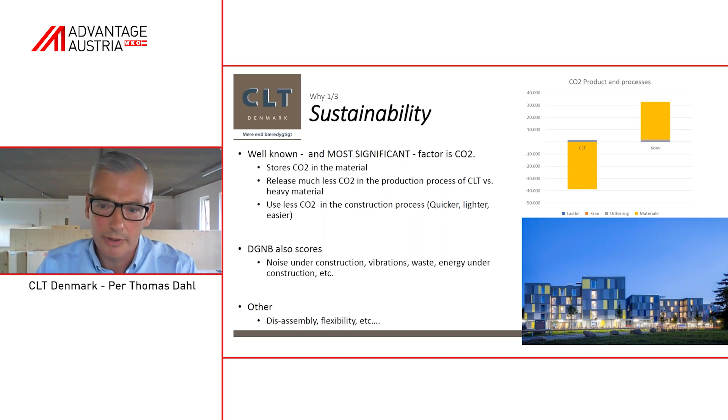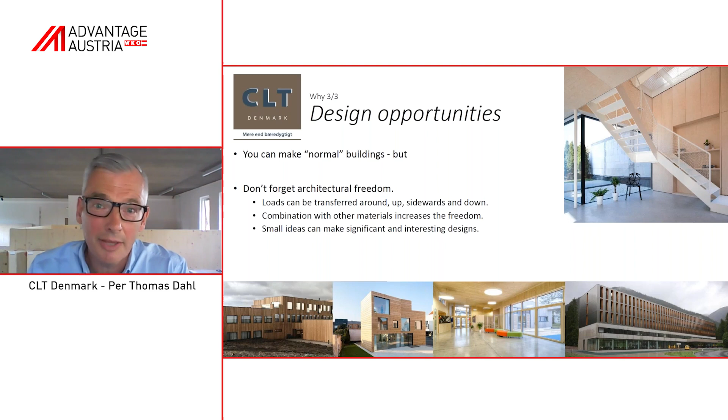It's a new library in Barcelona, and it's being erected at the moment. Some of the pictures I will show you were taken in March, just before the Corona close down. Not much has happened since, but now they have started up at the construction site again. Look at this picture, for instance. Look at the way it's working, the view through it, and how you move around with the loads. I think it's very impressive.

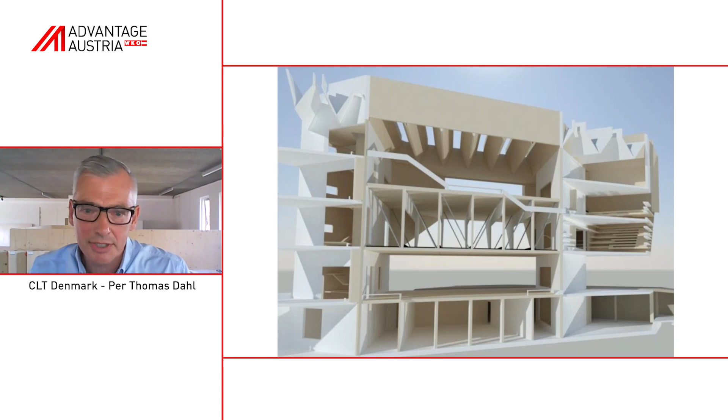And here you can also see the combination of materials, as Michael talked about in the opening. Here you use steel. You will also have concrete, and of course you will have glulam and CLT. So it's all combined, and I think it's very interesting.

Unfortunately, I got some latest pictures yesterday, which I wasn't able to put into the presentation. But if anybody wants to see more of this building and be challenged by it, you're most welcome to contact me, of course. I look forward to seeing this building when it's done. But here you can actually see, I think CLT is quite a simple product, but the way it's used here is so challenging that you will get a great architecture.

So the conclusion of the idea and why, seen in my perspective, is of course the sustainability factors, but it's also the BIM-VDC and the process factors, so we can start working as a professional industry in the building industry, and then it's also the architectural freedom. So that's a conclusion on that.

When we look into the processes and the decisions of how we're working, of course, early involvement, like any other project, is important here. And yes, we will be able to go into a dialogue from this industry with any kind of architect, building owner, engineer, in order to optimize the projects. I will come back to that.

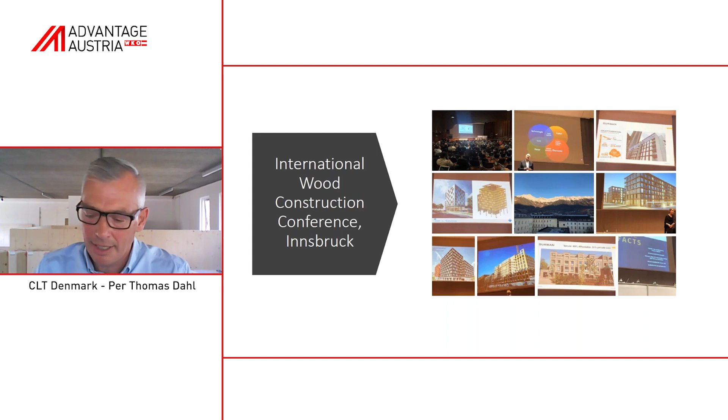So we should exchange facts from other projects regarding design, as I said on the slide, planning, structural engineering, acoustics, fire, and also the education on the installation, and I will come back to that. So the do's and don'ts, let's work together with the industry.

And then the last slide on this part, I must say the CLT guys, they know their business, like the concrete guys know their business. But these, I'm impressed. I've also worked with concrete and other products, but they know how to load a truck. They know how to make the order of assembly. They know how to optimize the production of CLT. So everything is just in order. So you will be guided through the process.

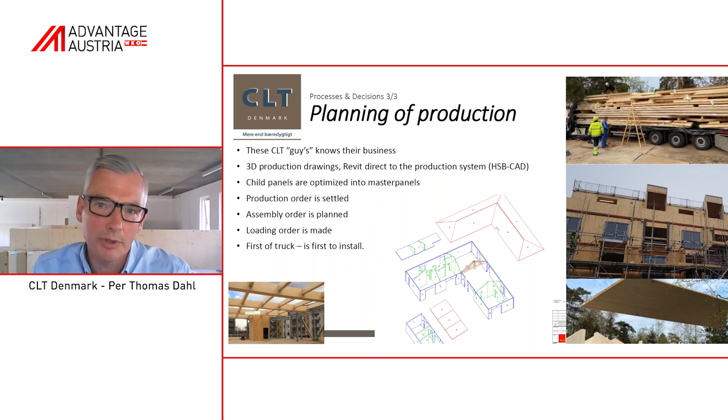So the conclusion, I think, on the processes and the decision here is: you have the knowledge, you should use it. You have the opportunity of early involvement, and you should take the large savings you have making the optimal design. And then actually planning is quite easy. I will come back to that on some of the next slides. But this product is so precise. The tolerance is 1 to 2 millimeters, so you can actually carry on with your work immediately.

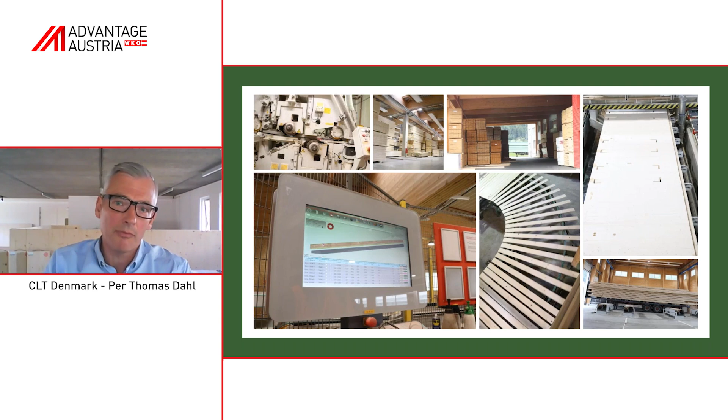On the right-hand side, you see a finalized panel where the CNC is working, and you're cutting out doors and windows and installations and so on. It's all done automatically. It's all done by Revit, talking directly to this machine.

We will talk about teams, who will do what, number of teams, what kind of protection system, scaffold, lifts, and so on. And then, of course, when we mount, we start to mount preliminarily, so we will just attach a few screws, but immediately after, we attach all the screws, and we will also make the quality check right away and on the go.

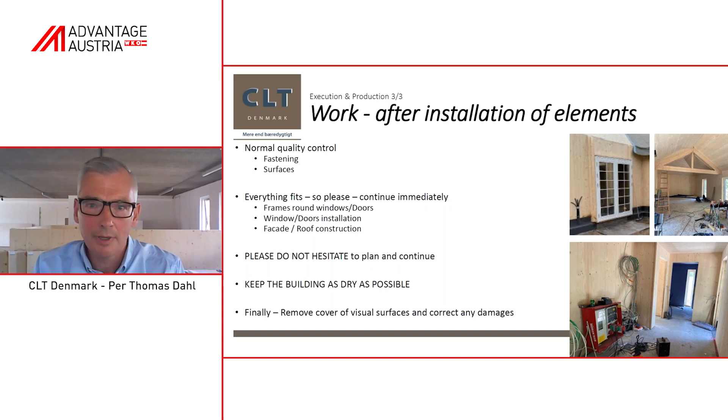And of course, keep the building dry. You have a dry product coming in to your site, keep it dry. And there are, as I mentioned earlier, different possibilities to do that. And then finally, at the end of the day, remove the cover and correct any damages which have happened. But I must say it's not much. But of course, things can happen.

So at the end of the day, execution and production: you have made your construction strategy, maybe together with your business partner, in some cases hopefully us, but in other cases other partners. You have no tolerances here, or very low tolerances, so make the quick assembly, keep the building dry, make your final quality control, and you are on the run.

So in total, just recapping. First, CO2, sustainability, BIM, VDC, and the lean processes also in the design. That is the idea and why, and the architectural freedom, don't forget that. Next, the processes and decisions. We have the knowledge all over the world. We are taking some of it to Denmark now and using it, making the early involvement in the design process. Everybody around the table is very keen on being part of the design phases, so let's make the planning.

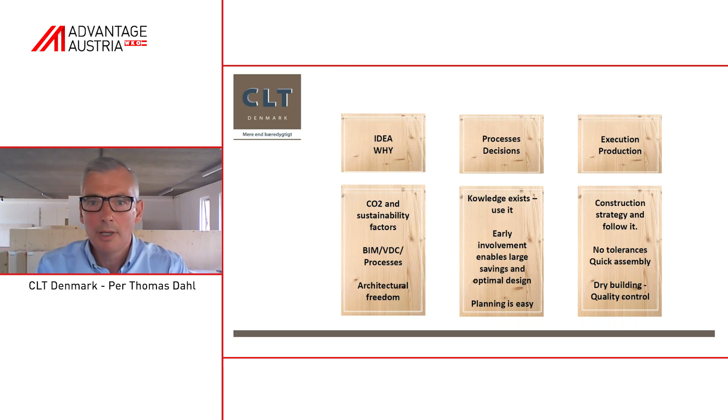And finally, on the execution and production, you follow your strategy, be aggressive in your plans, keep the building dry, and make a thorough and good quality control. And my last slide is just a little bit of an appetizer to see some of the nice buildings which are created around the world, and hopefully it's also giving you a little bit of appetite, Michael. So maybe I should invite you into the screen again, if you have any questions.

I do have questions, Per. Thank you for your presentation. We actually got one from the audience, and the first one is, who's the architect of the Barcelona library? Do you remember that? Yes, I have the name, but please contact me afterwards so I can give the details, or I can write it there. I can actually find it during the other presentations. I can't remember the name, but yes, I have it.

Then I have some questions regarding, do you do turnkey projects, where you deliver both the materials and the people for mounting it? Yeah, our setup is that right now we don't want to employ blue collar workers, but we have found some very good business partners, large contractors and smaller contractors, depending on the size of the project. So we can easily find people whom we will educate and use. So yes, we can also make turnkey projects. And of course, if it's a fully turnkey project, we would find the right contractor to work with us.

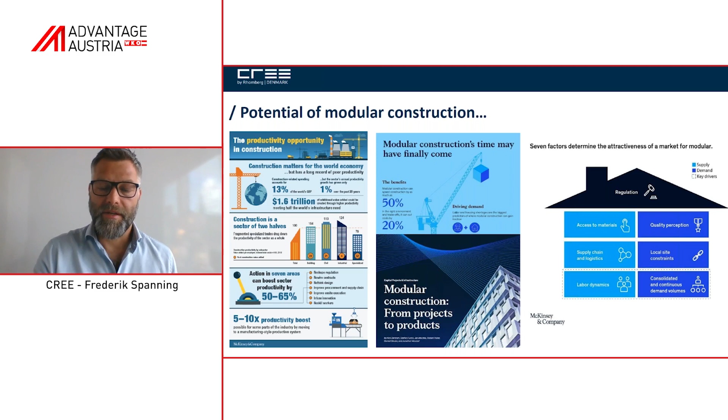We've been talking about materials, and we've been hearing Per talk about materials. So yes, that's of course an important part of it. But mastering the design to support modularization is of course very important. Our technology needs to support it, and the whole outset has to take logistics into consideration, and of course assembly being something that we have to take care of right from the outset.

The outset in this way of working has to be early. We cannot wait till we've decided on perhaps the aesthetics of the building. We have to start very early, and as we've heard previously, BIM gives us some opportunities, but we have to have a real determination to have this discussion at the earliest possible time, and today with very well defined components, it is possible to have a real discussion at the very early stage about how to become modular, how to improve this productivity, and of course the goal for a lot of us is to save costs when doing this.

So early discussions, according to the McKinsey research, will bring us into a situation where we get a kind of sweet spot between quality, time, and costs, and we can bring these meandering processes that we have in construction into a true discussion about the actual product, which is what the client takes away from it all.

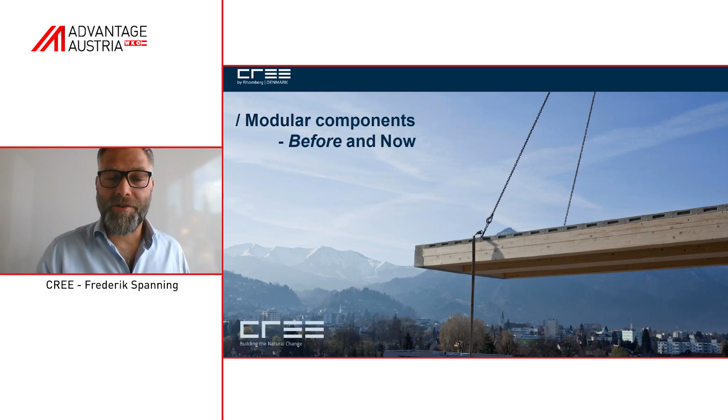But we're not quite there yet. We have gone, certainly in the 50s and 60s in Denmark, through a great wave of industrialization, but we haven't moved productivity, and we haven't really moved time. We're not really faster than the building we saw on the slide. So what is it we have to do? What is the next step in this? Well, if we really want to be industrial, we need to look at the components, and of course the materials.

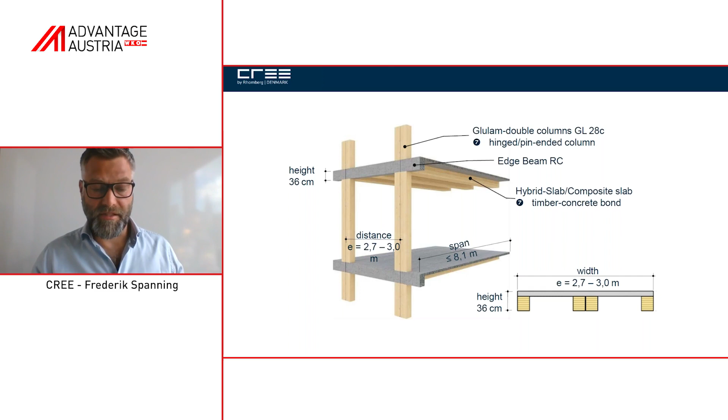Well, basically it's because it supports the idea of modular. It can be made to very high precision. It supports the idea of industrial, and it's possible for us to make this transition today, even maintaining all the requirements, all the regulations that we have. In this case, in Cree we've used it for a systemized approach in the LCT system, but we also use other materials, mainly for the reason of regulation, but also because we want to use each material where it's best.

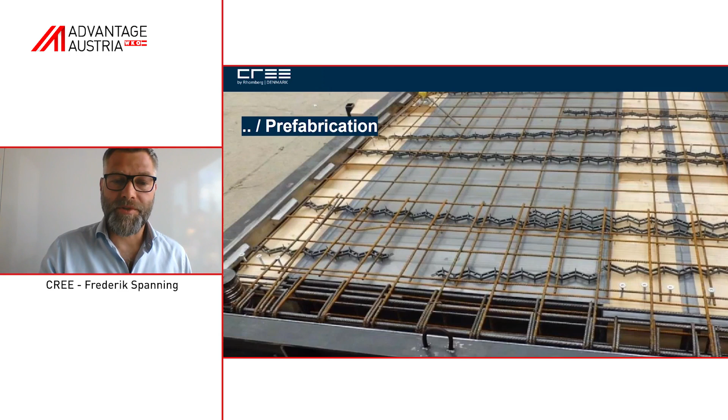So to do this, to get the efficiency, to get the productivity and the low time, high speed on-site, we want to move away from the on-site processes. We can't control them, and we want to move into controlled environments where the environment is good, the work and health aspects are good, and basically bring prefabrication as far as we possibly can. The more accurate we can be, the less time we spend on site, the more we can bring up productivity, the faster we can do it.

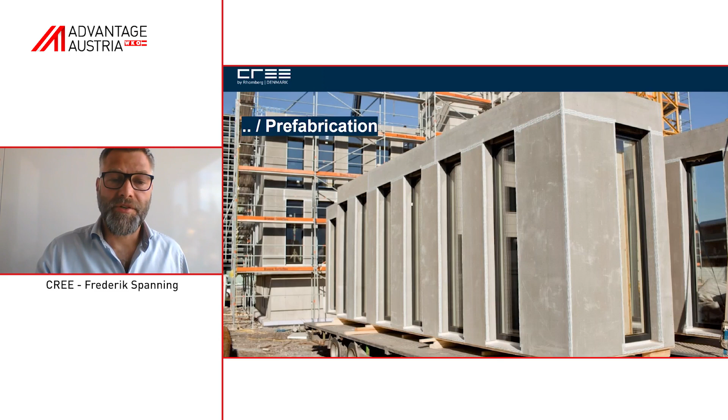Here, slabs ready to be shipped in. The more functions we can put into components. In this picture, we have a facade element with multi-functions. It has load-bearing capacities, it has a window, the insulation, and it also has finished surfaces. And not least, it has an ability to be shipped and assembled very quickly. Logistics is a huge part of it. Of course, we need to have logistics as a kind of a driver for the design, and to think in the logistics right from the start.

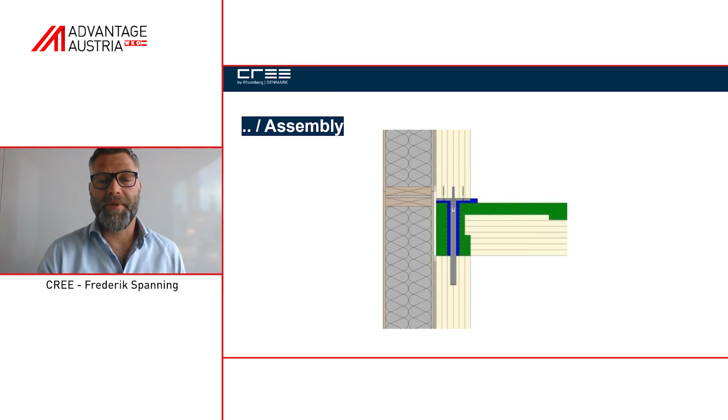So what we want to do is move away from the sort of erratic, non-controllable processes on site. We want to be able to assemble very quickly. In these examples, you have industrial components that are very simple. They are repeatable. You basically have the same type of connecting in all buildings all the time. So in that way, there are no surprises. The joints are visible. They're not interlocked and cast together in a way you can't get them apart. So you can also disassemble, but it's repeatable. It's simple. You don't have to reinvent it every time.

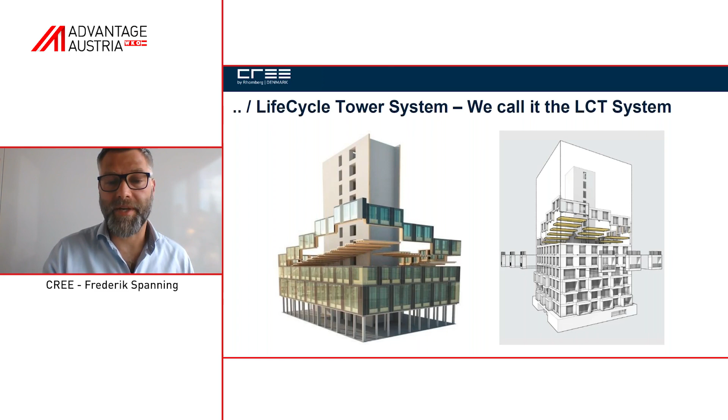So the concept of moving construction into assembly is a very important part of it. And of course, all of these aspects need to be put into play and be aligned for a very quick assembly. A lot of you have seen this before, but it's still a very good example, I think, of how to put together a building of 8 floors in 8 days. Now, obviously, a lot of thought has gone into this, but it still says something about how to be modular, how to be industrial, using the logistics as a design driver.

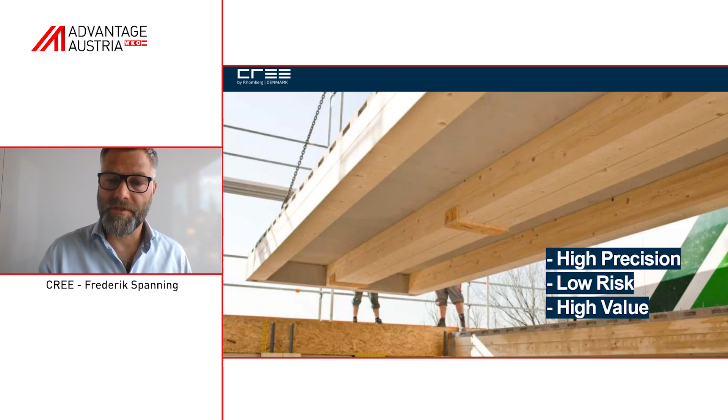And you end up with this room. It's a dry room. It's a superstructure that's airtight, weathertight. You can make a blower door test on this, and you're ready to work the next day on the next layers, the next surfaces that have to be put into the building. And what drives this? Well, the wood gives us the opportunity to have a very high precision. We have such a high precision that we draw the tolerance and we build with the tolerance. It lowers our risks and it increases our value.

Being digital is a huge part of this. And maybe this is not the sexiest of slides, I admit that, but there's actually a small film on this, and I might just urge you to go into our technical partner's LinkedIn profile, HD Lab. They helped us by making a parametric design where we can use the specific components. So some of the components you see in this slide, they actually put together

as a tool to make the design at the very first meeting, almost the very early days with clients, with architects, with the design engineers, make an easy to use sort of interface on how the components, the actual real life components, are used at the very outset of a project.

So have a look at HD Lab's LinkedIn page and see how the modulo that they quickly hacked with the simple software, how that can be used to generate buildings and bring home this message of modularizing the construction to the partners in the project, and that way get this integration vertically and horizontally that we're looking for.

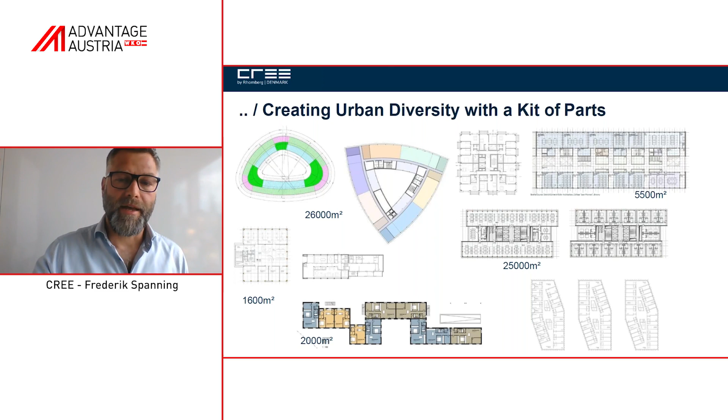So why does it all have to be square, you say, when you build modular or industrialized? Well, it doesn't really. All we're looking for is repeatability, and for modules that can be built and transported. In this case, you can see various footprints, all built with the same solutions for same detailing, the same connection details, and the same industrial processes.

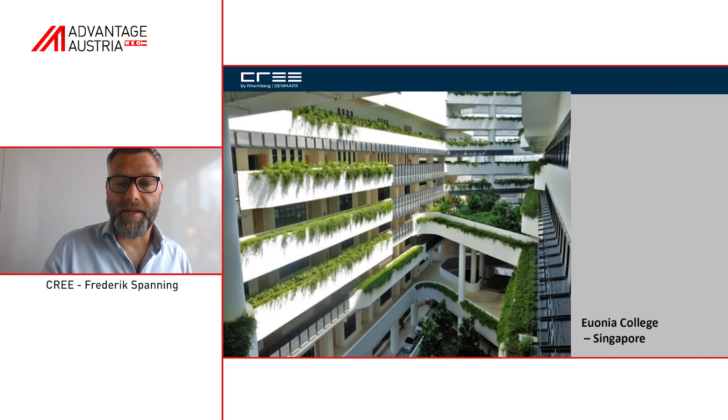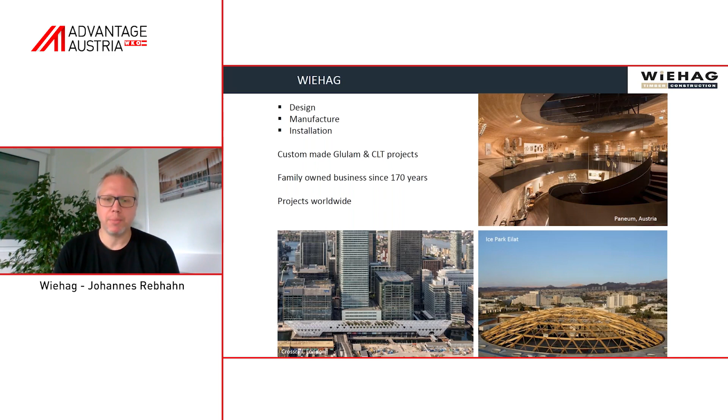A few words to my background. WIEHAG do design, manufacture, and installation of customized glulam and CLT projects. We are a family-owned business since 170 years, and we do projects worldwide. Some of you maybe remember the Paneum in Austria, the so-called House of Bread, or as Cosima said, Norman Foster's Crossrail station, the longest timber building in the UK, or the ice park Eilat, which has the longest span in timber in the whole Middle East.

We are based in Altheim, a small village somewhere in the middle between Vienna, Salzburg, and Munich, and we have sales offices in London, Stuttgart, and Bilbao. So you can see Denmark is not too far away. In the next 20 minutes, I will present 3 case studies. The first is the Macallan Distillery in Scotland. The second, the St. George College in the UK. And the third, the local project, the Hans Christian Andersen Museum in Odense in Denmark.

The first is Macallan. Some of you maybe know the Macallan. It's one of the most expensive and most famous whiskies. Sometimes bottles are sold for more than 1 million euros. And so the most important precondition of a project was already fulfilled. That means the client has enough cash. So he decided to make a great design. They involved Richard Rogers, meaning RSHP architects, and Arup engineers. Robertson have been the main contractor, and we were responsible for the timber roof.

And as Per and Frederik said already, early engagement is very important, and that was the case in that project. So we were on board at a very early stage and could influence and help them and make the project a good gain for everybody.

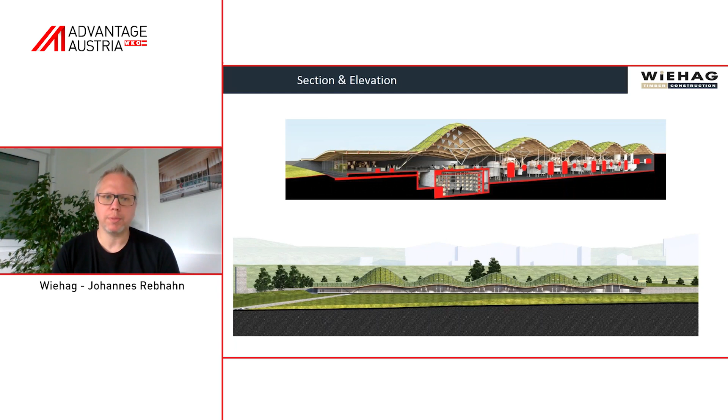Then the design process is very important, especially on complex projects. You have to think that there are the geometry and the architectural requirements on one side, and then all the other things have to work, let's say, for the architect more or less. So we have to ensure that the total stability works and that the structural strength of the timber structure is enough. But furthermore, we then have the connection design and the building physics.

So complex projects are maybe sometimes only complex because of the geometry, or because of the structural system, or because of the building physics. But in this case, all 3 corners have been complex, and therefore I would say it's one of the most complex timber roofs worldwide.

And working with celebrity architects like Richard Rogers or Norman Foster is a great honor, it's good fun, but it also means what they want, they get. So there is not really much room for compromise. And in this triangle, or in this circle, we were running for more or less half a year in a very positive way. So if one thing didn't work, we went back and tried to move it. So we like that design process where we are really challenged to fulfill ideas.

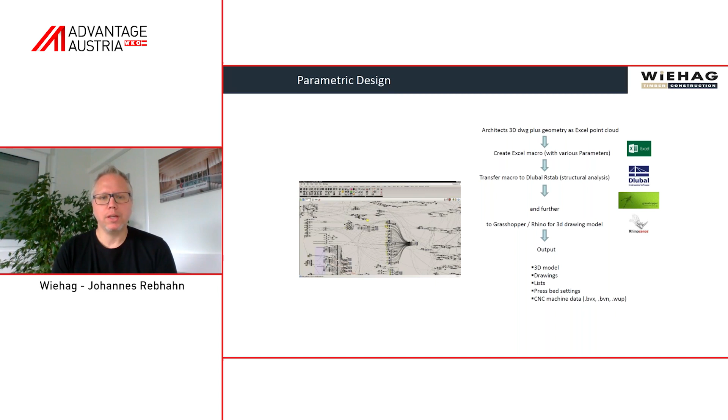That means we put a lot of parameters into the Excel and transferred it to our structural system, and from that to our drawing system. And so starting with an Excel sheet, at the end you have a 3D model, you have the drawings, you have all your lists, and you already have your information for the CNC machinery in the production.

Even with all the parametric design and all the CAD work and the computerization and the digital work, you still want to touch something. And we talked a lot about the connection: how does the point look when 4 beams meet in this complex geometry. And so the architect made some samples in his model shop, and we made some nodes in our factory. We lifted them up in the air to get a real understanding of how it looks in the project, because you don't need to see it from 1 meter distance.

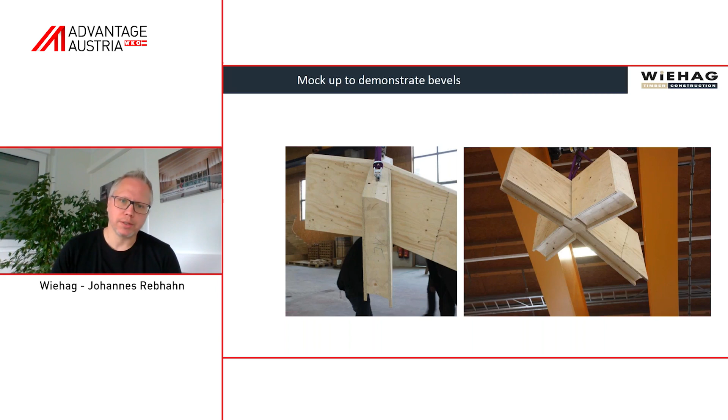But if you have a closer look like that, you realize that it's not only glulam, it is a glulam core with LVL cheeks on both sides. That was the architect's idea. He liked the visual look of the LVL. It's more industrial. And with those cheeks, you also create a channel on the bottom side, which was also the architect's idea and makes sense.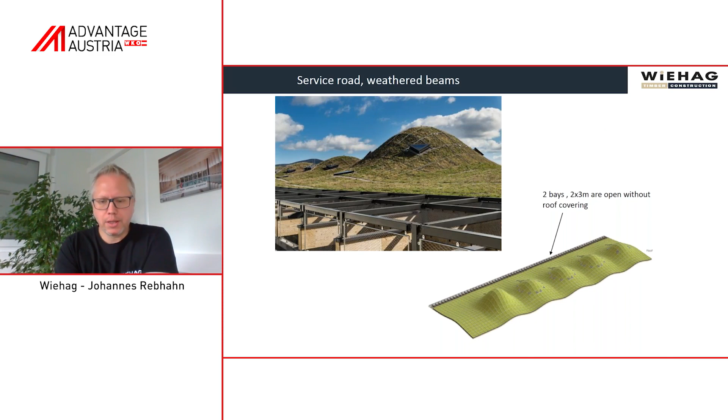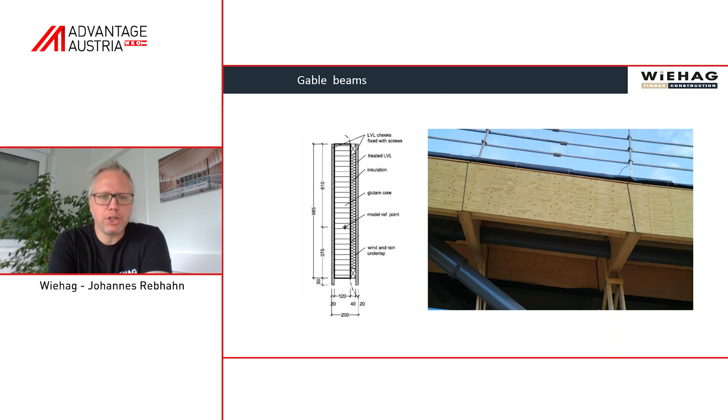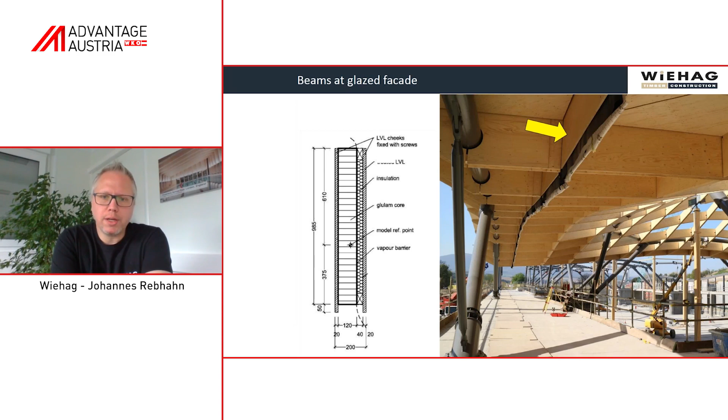And in this case, we applied pressure-treated LVL panels, but with a small gap for ventilation. So the structural element is always dry and lasts forever, and maybe you just have to change the LVL panel every 25 or 30 years. Some beams were on the gable, so again we had to apply a pressure-treated panel, including some insulation. And where the glazing facade met the beams, we naturally had to implement the vapor control layer to ensure proper building physics.

You see now some pics from the production. Here you see the connections. One advantage of the LVL cheeks was that the connections could be quite, let's say, straightforward, very traditional, no big architectural requirement, because they are anyway hidden from the panels.

And once you push the button in the production, suddenly a lot of steel parts and a lot of timber parts are there, and the biggest challenge was simply the logistics, that you know which element goes to where. That was handled with the barcode system, so our production is really fully barcode guided, and every single element, and then the finished composite element, has a different barcode, and we know which element has to be on which position on the truck, and then of course on site.

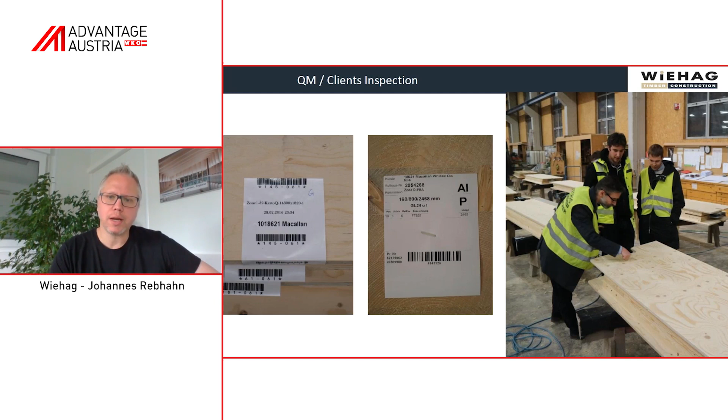See also a picture from architect's inspection or client's inspection. And then next slide shows the installation and the production of the roof decks. The roof decks are made of CNC machined timbers and then manually screwed together, and again CNC driven application of OSB and LVL boards. The panels have been, let's say, empty because it was a green roof, so all the insulation was then on top of this structural deck.

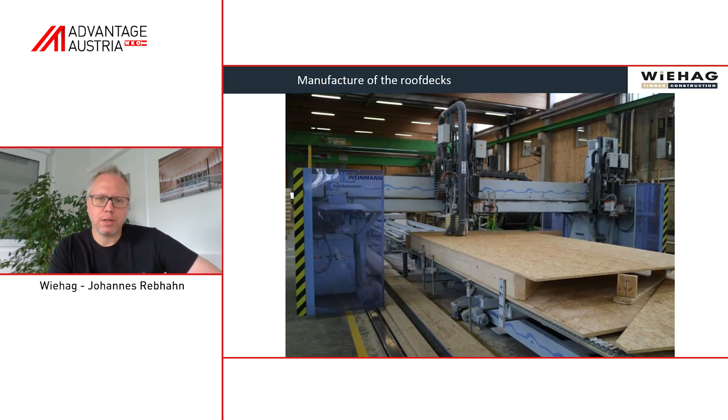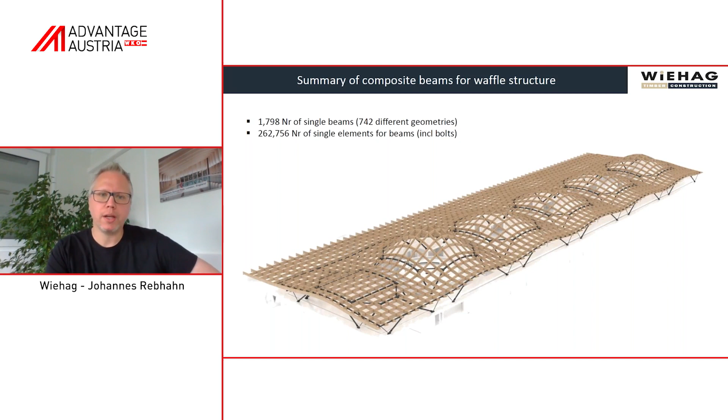You see, they look maybe all the same, but they're all slightly different, and that brings the complexity in the project. So yeah, complex thing and the challenge, as said, is the logistics. And if you see, you have 1,800 beams, and roughly 750 of them had a different geometry. You can imagine that this is a challenge, but yeah, all went well. Same challenge on the roof decks. Most of them have been triangular in order that you can achieve that shape, and again, more than half of them were a different geometry.

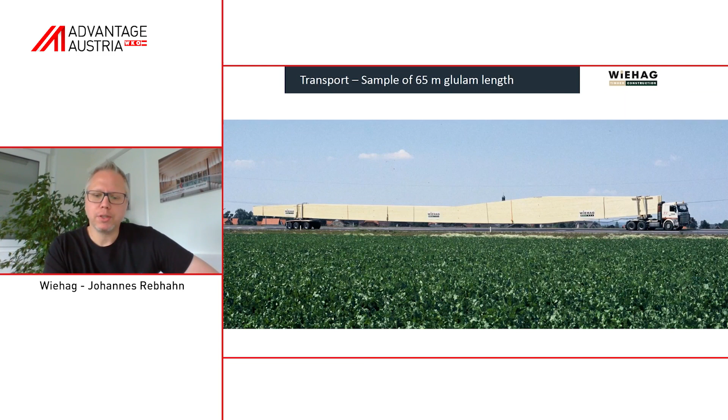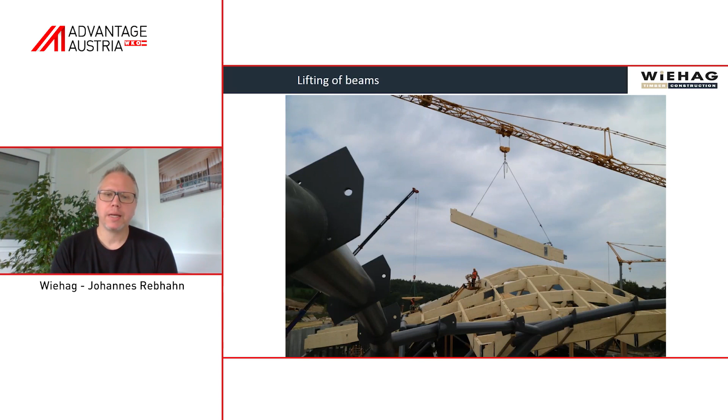So the installation starts. We required some temporary props for the domes. Normally you make that maybe with a scaffold tower, but as we are a timber company, we make our timber tower with a hydraulic jack on top to allow support during the installation. And then we lifted the beams and beams and beams. So really over 25 weeks, 2 gangs, 2 cranes, we installed the beams and then the roof decks.

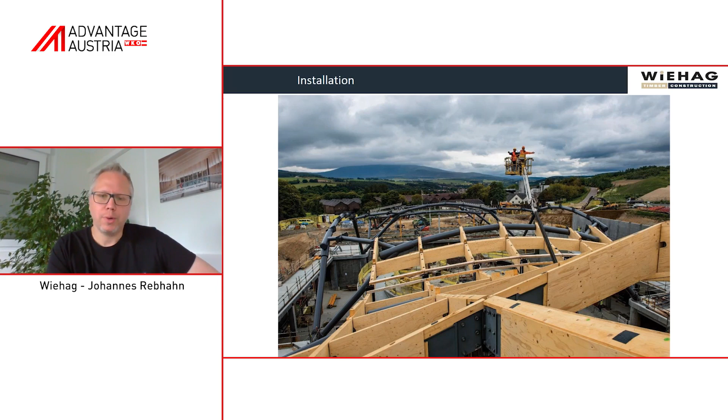Yeah, for timber construction, it's very important that the high quality product which leaves the factory remains also a high quality product after installation. That means we don't use any belts or slings. We use wherever it is possible lifting points, lifting screws to maintain the quality. See here, clouds are coming, typically Scottish weather. So there was a lot of wind and a lot of rain, naturally because it's in Scotland, but yeah, everything worked well during the installation.

Also the roof decks are flying in, and you see they have to fit really perfectly. On every project you discuss a bit the tolerances and how you manage tolerances, but honestly with the CNC machinery nowadays, please forget that. It's not a real issue. It simply has to fit, and it fits.

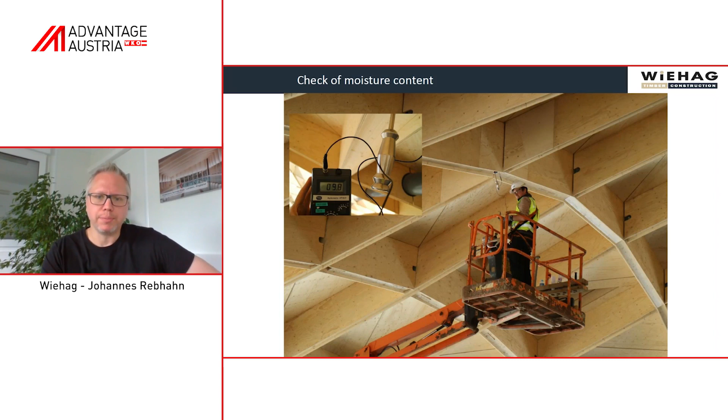Another view during the installation and check of the moisture content. Interestingly, that project is the driest project that we have ever done because of the still houses. The still house is running 365 days and is permanently heating. That means the timber moisture content goes down to 6 or 7%, which is really very dry for timber. You see how perfectly it fits to the Scottish landscape.

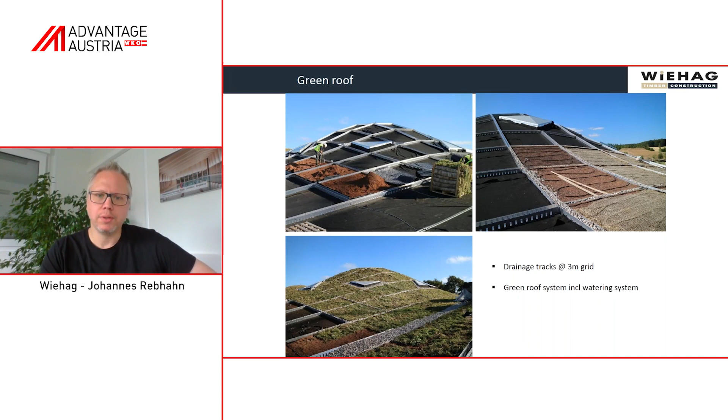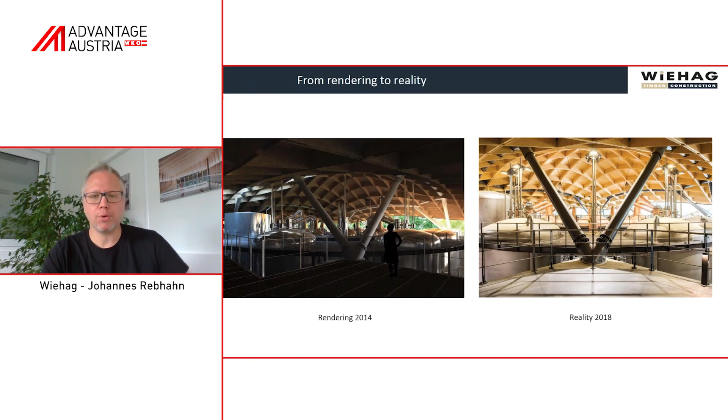It's really a cathedral of whiskey. So once you're there in Scotland, I think it's a must to visit it, not only because of the timber, also because of the whiskey. Just try it, it's a real experience.

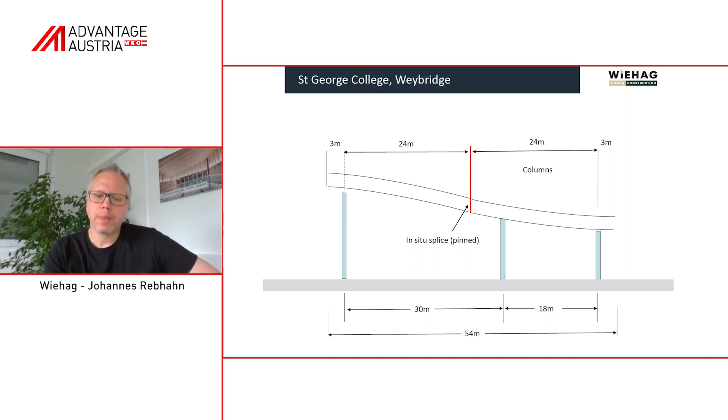And as the building is between 2 levels, the architect's idea was to lift it on the one side and push it down on the other side, and that brought the complexity into the roof. So it's a real twisted timber roof. The section looks quite simple, 54 meters on 3 columns, and instead of delivering a 54-meter long beam, we divided it in 2 pieces, as in that point the moment is anyway almost 0. So that looks quite simple.

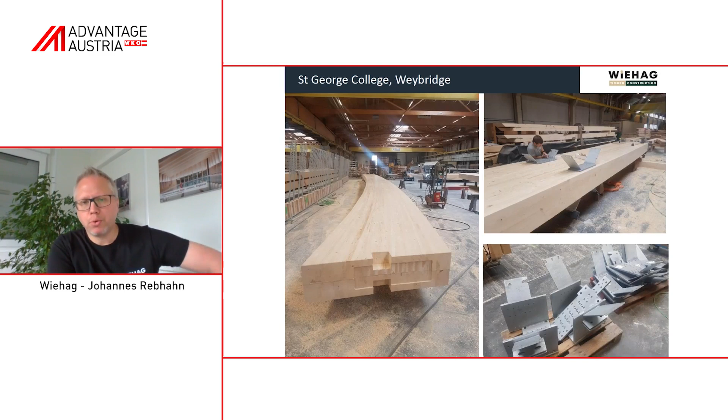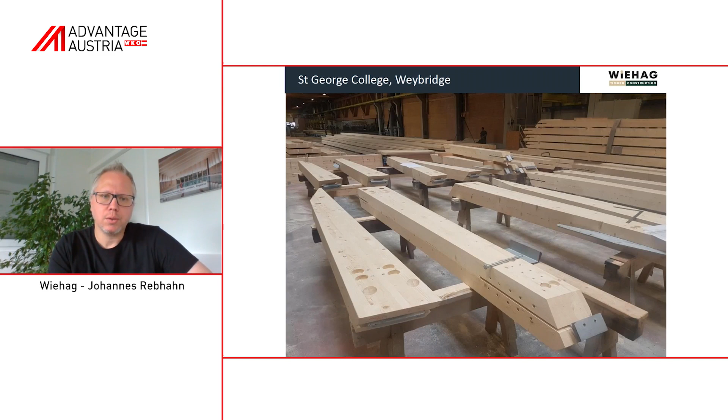Some pics from the production. You see, it's very important to pre-install the steel parts in order to have an easy life on site, to have only steel-to-steel connections on site. Also here, these are the secondary beams, the purlins. And then you see how big the elements are: 1.6 meters deep, 24 meters long for the main beams.

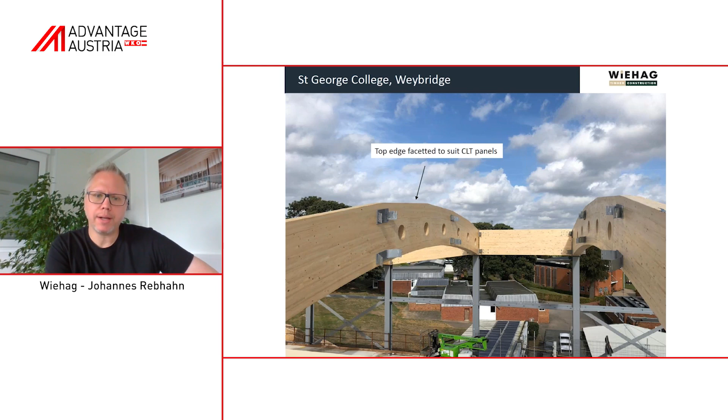Few pics from the installation. And you see the top edge of the beams is slightly faceted to accommodate the CLT panels. The bottom side is perfectly curved. Great picture where you see all faces, beams, purlins, and cross-laminated timber. You see here the double layer of purlins. It's also architectural. You could do perpendicular purlins and just one layer, but they wanted to have 2 layers and some penetrations through the beams.

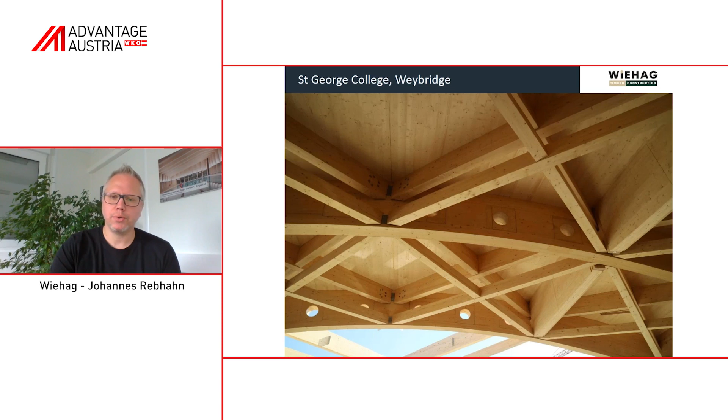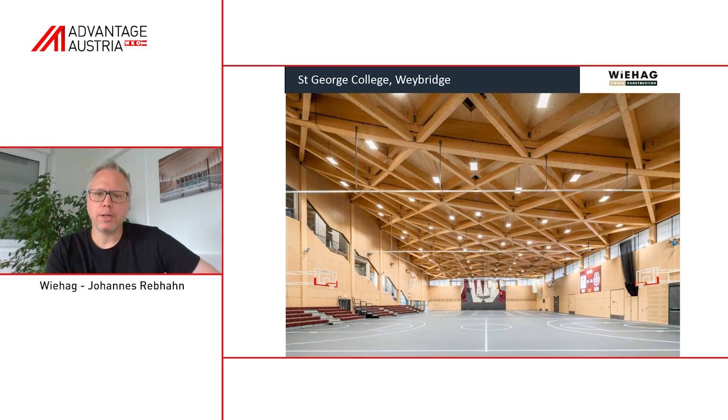And once you walk on the roof, you feel a bit drunk because you have no horizontal surface. It's always going up and down, but it was a great experience. And final signature shots from that project. They even have a glass floor with LED lighting underneath, so you can switch on your basketball lines or your volleyball lines. Really spectacular sports hall. And the last shot of that project, where you really see that complex shape of the timber roof.

And that leads me to the last and local project, which is the Hans Christian Andersen Museum in Odense. Our client was the city of Odense, and they got the money from the Maersk Foundation, A.P. Møller Fonden. They found a celebrity Japanese architect called Kengo Kuma, who came up with a great design. And they had a great local design team to make that all happen, which was Cornelius Vöge Architecture and Vitae Engineers.

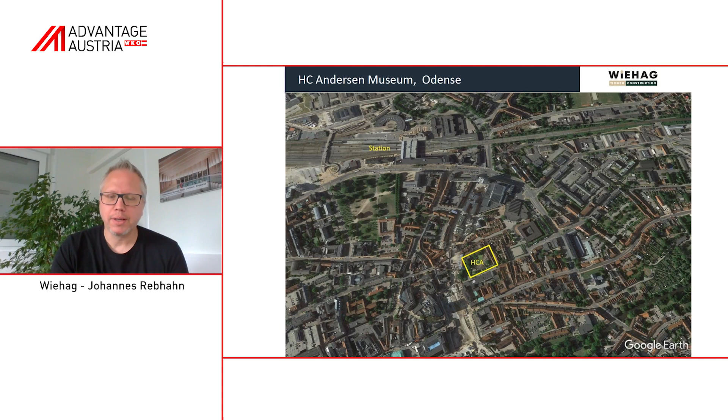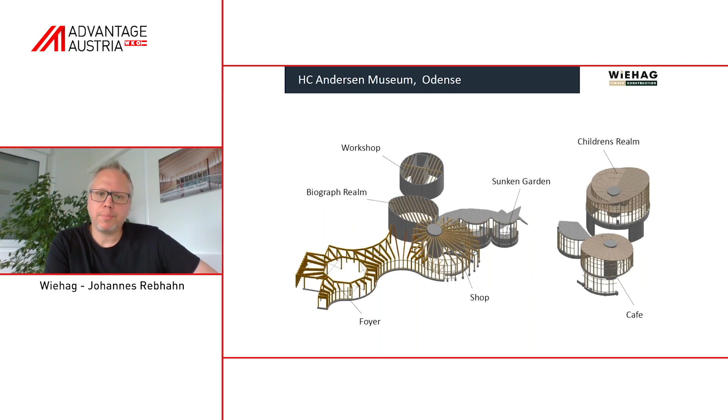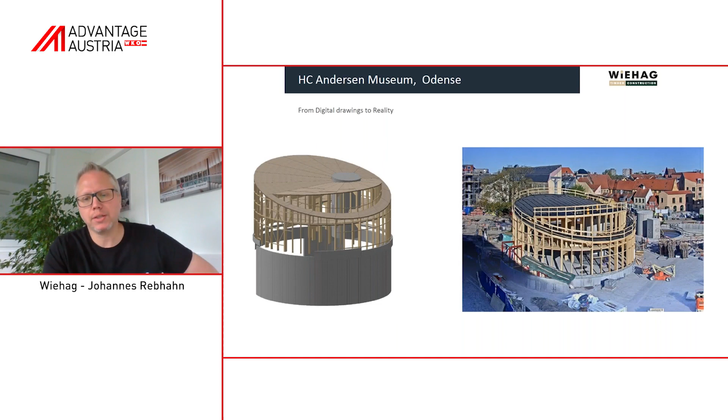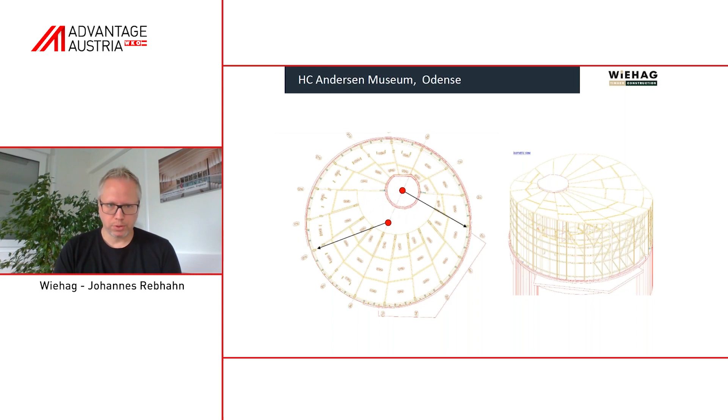Pre-installed steel parts, all good for 30 or 60 minutes fire resistance. And one of the complexities was that on all these round buildings, the center was different. So the facade columns had the center in the middle of the circle, which makes sense, but the beams had their center somewhere else in a concrete tower, which was eccentric. That led to a bit of complications, as you see in the red circle. So this connection design was quite difficult, but we solved also that one.

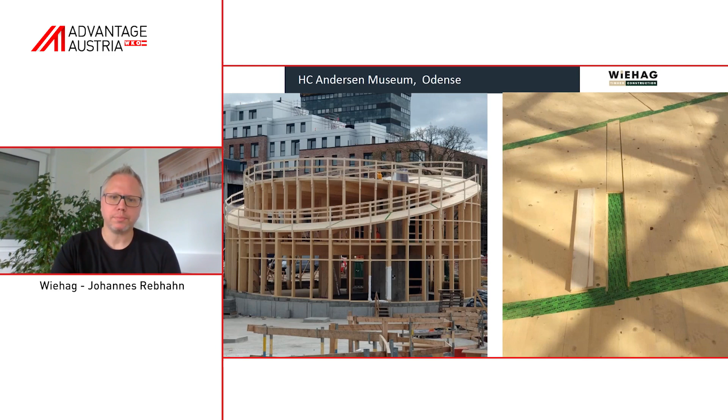Another challenge was that we had to join two very old buildings, so there was an on-site measurement, and then starting from the on-site measurement, we made our drawings, and everything fitted perfectly at the end, so it was correct.

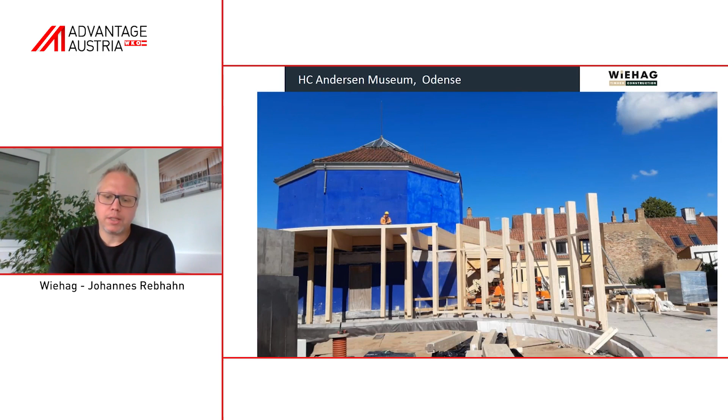So last picture of the job, which was really taken, I think, 3 days ago on site. You see some of the buildings are already wrapped because they're waiting for the glazing or other works. You see the complex CLT panels on the ground, and so we are still on site for the next 3 weeks roughly. In total, we have been 15 weeks on site, and that was our first project in Denmark. Very exciting, and that obviously makes more appetite for more projects.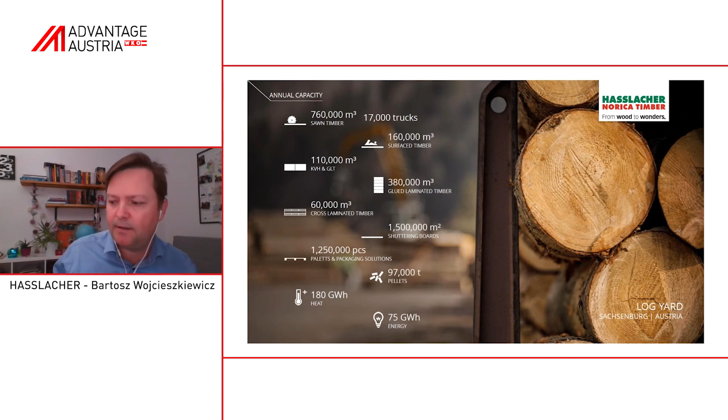So if we want to meet the client's expectations, which are, as I said before, the problems on the site, I guess, but not only, we have to go further and think about how to help the customers, how to make them free from those problems, like, for example, finishing surfaces by painting on site.

And if we talk about the CLT, we can finish it in our factories in a few quality options. We have a non-visual quality option, industrial visible quality or residential, and excellent quality. About excellent quality, you can find a lot of information on our website.

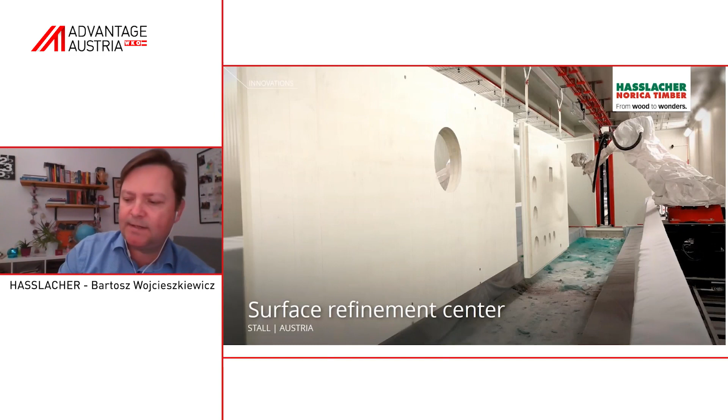So using our system, we think not only about the appearance but also about the situation, and that protection against dirt and yellowing on site lets us support our customers. So this is why we installed in Stall in Austria, in our location where we have the CLT panel production, that special robo line. There are two CNC-controlled robot arms, each with four fine atomizer nozzles. They can access up to seven color cycles and ensure the actual coating on the surface. Subsequent drying is carried out with warm air and pre-dehumidified air. An intermediate sanding system smooths upstanding fibers and prepares the surface for a possible second layer buildup.

More and more manufacturers are installing these systems, and they are coming from furniture technology, and they are only scaled up to load-bearing and large-format components. Before the coating process, a special sanding system with several directionless rotating units ensures evenly fine sanding and prepares the element for the subsequent coating.

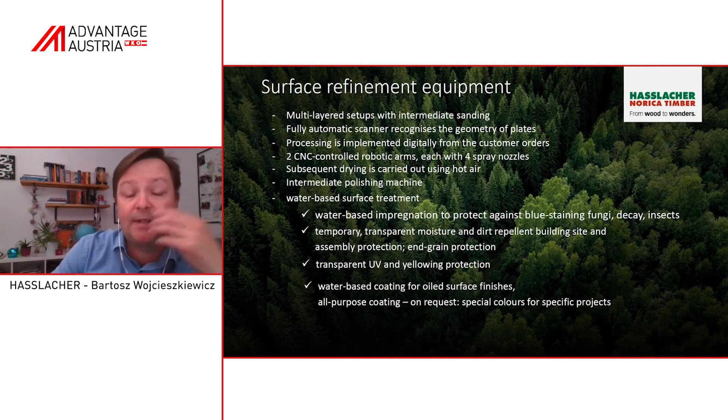We can sand it and make it more smooth. And we use only water-based surface treatments there, which are protection against blue stain, fungi, decay, insects. Also, it can be a temporary transparent moisture and dirt repellent on the building site. So that is the most important thing, I guess. Also, we can protect end grains and different other assembly problems here.

And all the colors we use, we can do on request, which come from the palette we are using. We use it also for oiled surface finishes, so that's also really possible. So we can use it on all of our products. We can use it on glue laminated timber, on cross laminated timber, and Duo/Trio, which are also our glued solid timber, and on special components like colleagues showed in the really impressive presentations on glue laminated timber, also on finger-jointed structural timber, and also on surfaced timber.

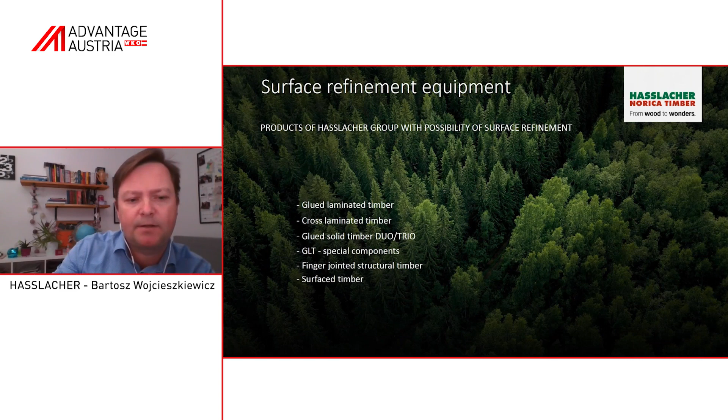What are the advantages there? That system allows us to achieve high resistance to environmental influences. It is applied in the factory, so it's a really high quality coating. If you compare it with the possibilities on site, it's much higher, of course, because it's water-based. We don't have any heavy metals, no plasticizers. It's really safe, without any toxic elements inside.

It's under control and really homogeneous, so much better than you can do on site manually. So it means it can also be cost effective compared with application on site, and a wide range of design options, of course, because you can manage it beforehand and through that application. And of course, there is low manipulation effort, which means minimizing the damages.

If we are thinking about our goals, of course it depends on the area of application. So if we talk about the refinement surface equipment, if we think about visible surfaces, then we can protect it against UV, and we can use colorless or transparent material to cover the surface coating. We can make it with oiled optic surfaces also.

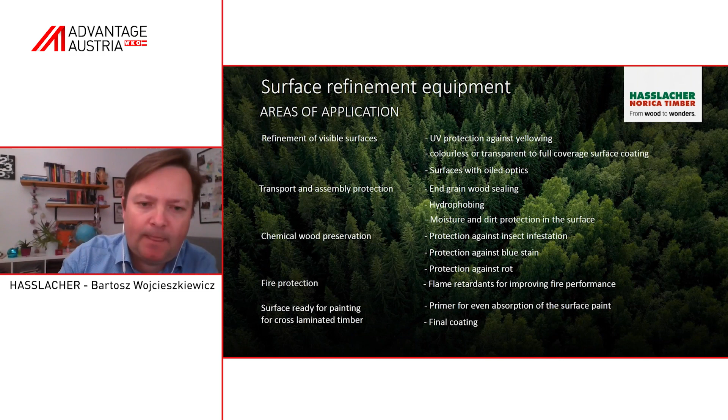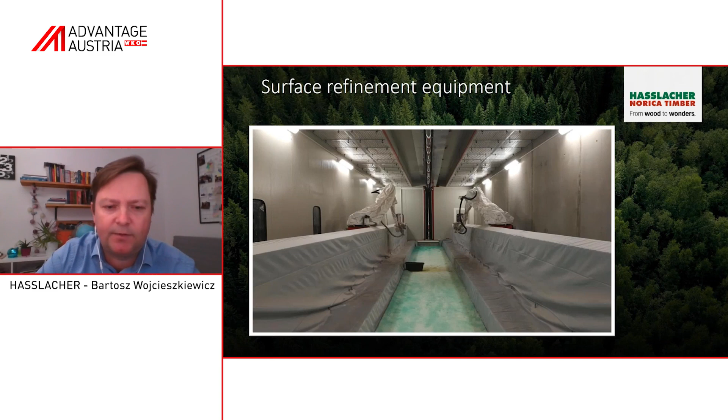And right now I will show you some pictures of that system. You can see here two robot arms, which are protected so they are not so dirty after the work. And on the next pictures, you can see our machine doing the work. And you can see here the ready panels with cut out holes for the windows with special CNC work.

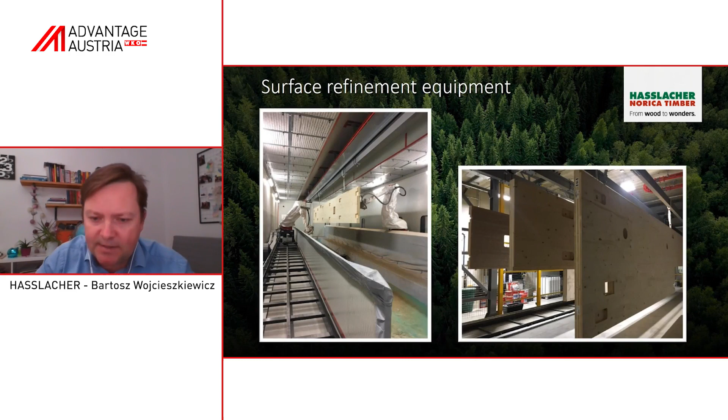And like colleagues said before, we can do some prefabrication and install the windows, the doors, and the different things clients want. Also, we can finish it with colors or a colorless layer if it is necessary. So it means that we can save time on site. You can see on that picture the special CNC cutouts which we prepared.

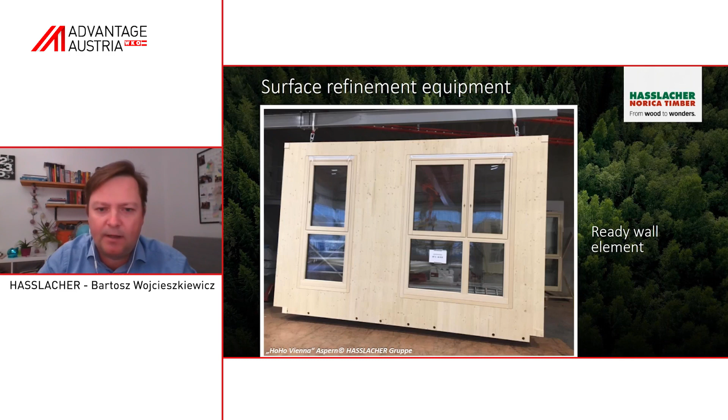I will show you the picture later, where we installed the windows, and you can see these perfect CNC cutouts for the windows. And then on the right picture, the window after installation, and that is the ready wall element you can see here with windows installed and with the CNC cutouts, also with some drillings in the bottom.

And here I will stop on the left picture, and on the next pictures I will explain it a little more. On the left picture, you can see the left and right side of this CLT panel is finished by this excellent lamella. This excellent lamella is a 3-layer lamella, so the top lamella is really thin, and it makes it really protected if we are thinking about gaps on site, and about moisture content changing. So that is our solution. That excellent lamella helps us with the problems of gaps generally.

But its advantage is also that we can use different products on the surface lamella, like oak, birch, or different wood like spruce, fir, and pine. And as you can see on that picture, you can recognize the excellent lamella on the left and right side. On the left side, you can see it without painting. On the right, it is painted colorless, of course. And you can see the light shining there.

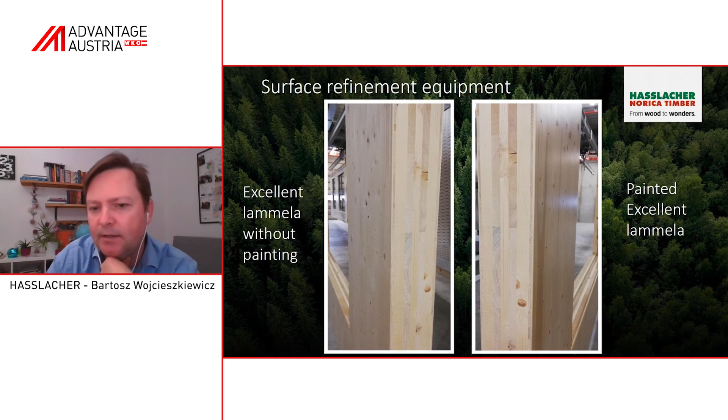Of course, preparing it in manufacture means that you can check it really well, and the quality control can find everything that is wrong there and repair it before it is delivered on site. Also, you can see here the membrane, which is also installed there. So you can install everything and deliver ready panels on site.

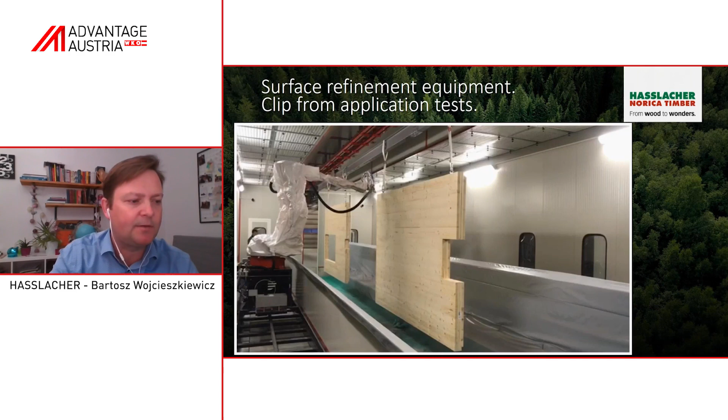And this is the sanding system with several direct rotating units. And you can see the sticks which are doing the sanding and preparing elements for subsequent coating. Also with this machine we can prepare some special structured surfaces or brushed elements.

And all of that we used in the HoHo building, where we delivered some elements of walls and columns from block glued glue laminated timber and CLT walls with installed windows. This building is located in Vienna, and it is 24 stories, a really high building, 84 meters high. I think at that moment it was one of the tallest wooden buildings in the world when we installed it, and it was finished a year ago.

We started deliveries in 2016, and we delivered 365 cubic meters of block glued glue laminated timber and 1,600 cubic meters of cross laminated timber walls with these excellent surfaces, two times coated with this water-based coating.

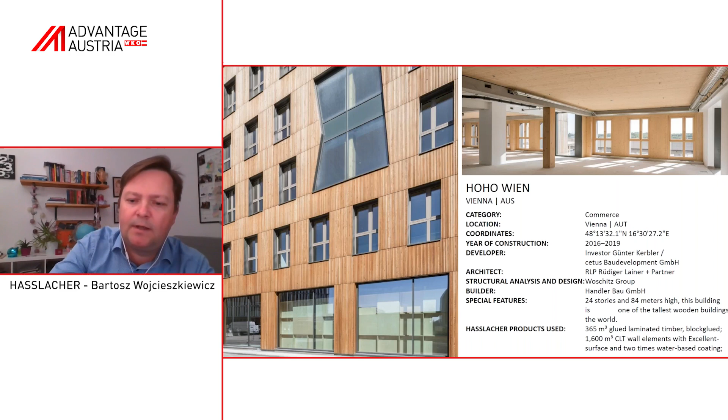And that is a picture from inside. You can see here the combination of CLT walls with these block glued columns, installed windows, and also CLT floors and beams from concrete, which were prefabricated. So maybe this is the answer to Michael's question. We don't always have to use that many concrete pumps and deliveries. We can also use a mix with prefabricated concrete elements, and it also works, as you can see in that picture.

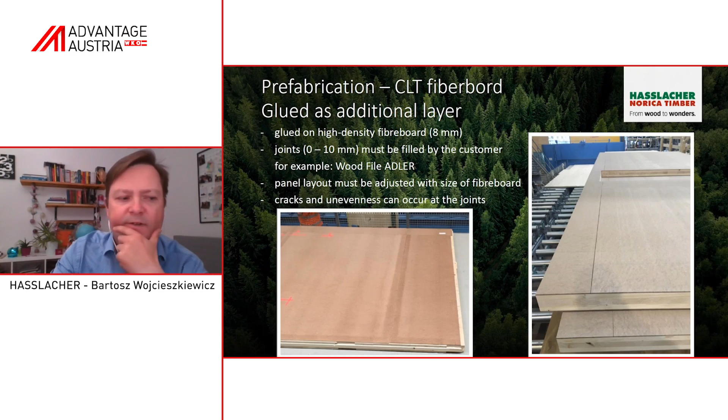Okay, another solution we can offer is about our possibilities for prefabrication. We can also prefabricate different surface layers. For example, here you can see the fiberboard which we glued on the top of the CLT panel, and panels are also delivered on site in this version. That means the situation on site changes so that you don't have to install it on site, so you're saving time. And you can see in that picture how it is under construction.

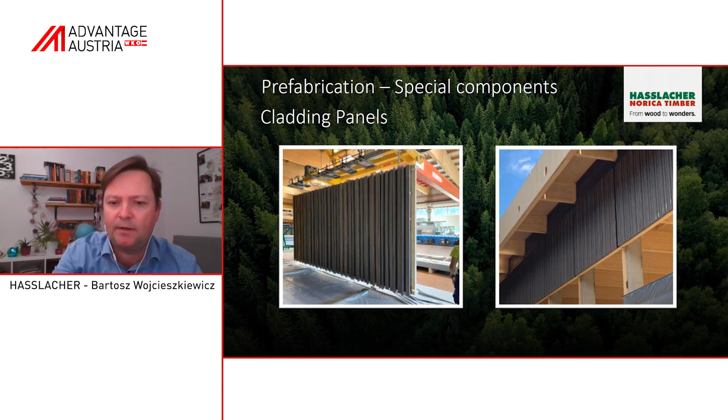And these are the different special components which we used for cladding panels. It's an example of special solid wood timber on the top, and we use it for the facade system. It's also painted, unfortunately not on that machine, but on a different system. But we can also use it, and this is a sample of how we can find solutions for nice surfaces and nice realizations of cladding panels or facade systems. So that's all from my side.

Sure. Talking about bragging, I will end up bragging for Træinformation. Just to mention that I've promised, and I'm ashamed of saying it, a CLT book on how to calculate CLT constructions. And it is actually getting close. We have been challenged during quality control by the fact that there are different ways of calculating CLT in Sweden and Austria. And actually we found errors in some of the calculation methods, both in Swedish material and in Austrian material. So that has been very challenging for us, to find out the right way of calculating it. We are so fortunate that we have two quite clever guys on it, also working with the EU standards. So it has given us some extra work, and that explains why we are delayed. I'm sorry for that. But at the moment, the plan is to release the CLT construction calculation book in August this year.

And then we have started up on how to assemble CLT in different modes and so on. So we have big ambitions, and we are looking for even more clever people to assist us. So if you know any, I would like to know. We are 10 people now. 5 years ago we were 5, so we are doing our best.